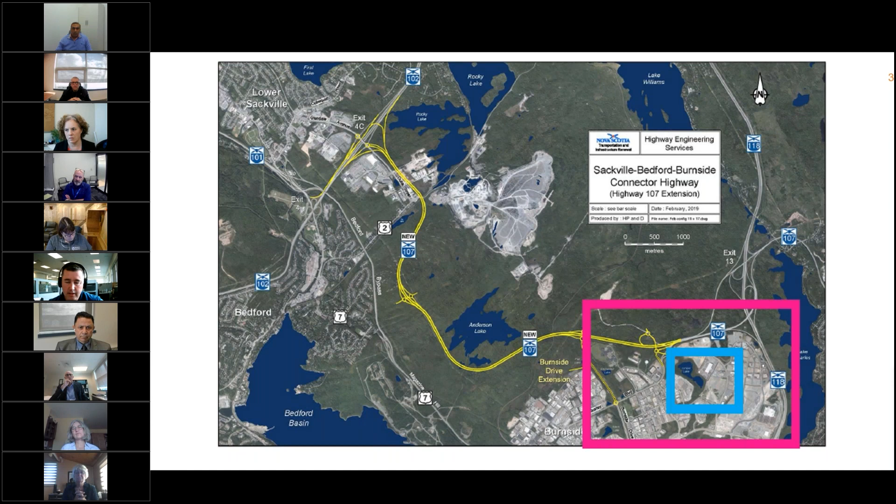The highway in yellow is the new highway being constructed by the province, a connector highway between Burnside and Bedford, to be constructed in 2024. So by the time we move into the building in 2026, that highway will already be under construction or completed. That's also the same route we're having as a right-of-way for the Bedford Burnside connector pipe, which will connect the Lake Major water distribution system with the Pockwock water distribution system along that same route. Next slide.

Now, if we zoom in a little bit closer on our map, this is our site. So we're very close to the top at Burnside, just off of Jennett Avenue. There's Wilkinson Avenue that you can see there, and that travels and connects into Wright Avenue.

The site to our right is going to be Midland Transportation, a transportation hub. Many of the other services around our site are light industrial, similar transportation hubs, sign companies, and repair shops. So we're in a very suitable location for this type of work, as well as the work around us.

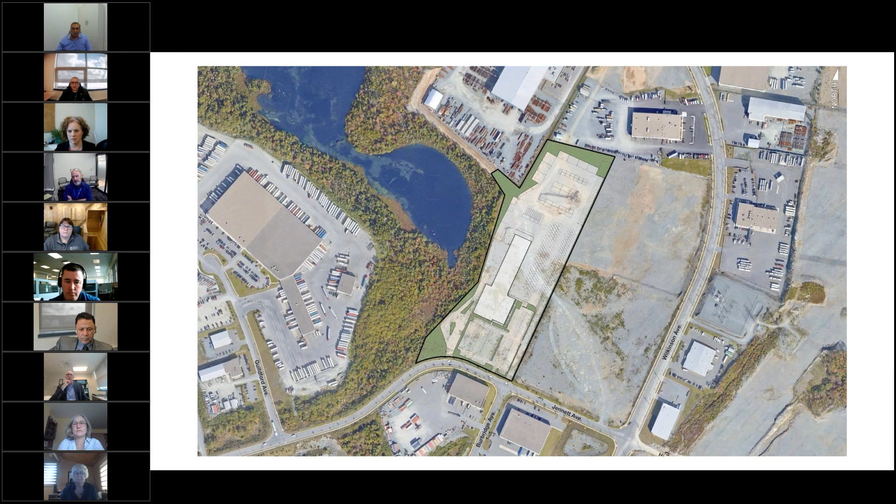As Reed and Tarek said, we've been working on this project since 2020, along with the engagement sessions. We've done a number of sessions with our staff, meeting with all the depots moving in together, as well as the combined depot, to learn from them. This is a change in culture and business practices. We've done multiple visits with all the staff to go over the changes, get feedback, and talk about what we could incorporate and what we couldn't, and why, to really get buy-in and keep them engaged and excited. Not everyone is super excited about the change, but we're working through it with our change manager to bring them along for 2026.

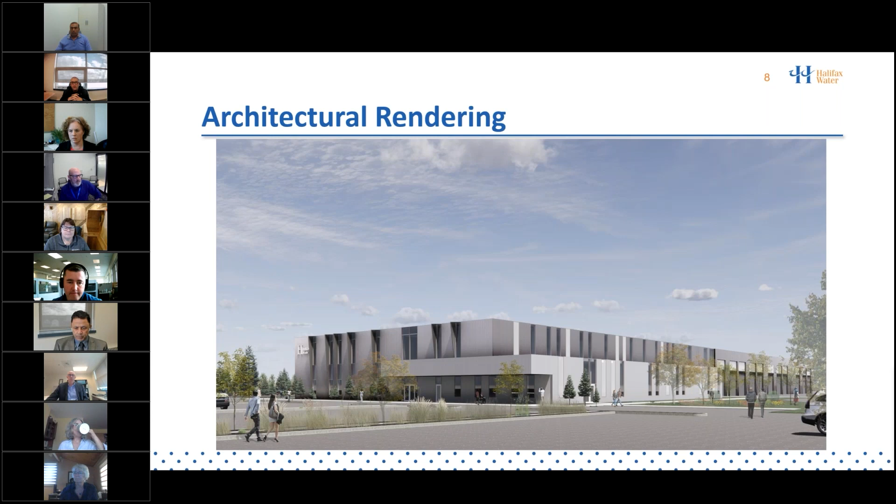So here's an architectural rendering of what the building looks like at this stage, or will look like at this stage.

This is the proposed level 2 floor plan. Currently it's a little bit smaller than the first floor. We plan to move in 150-plus people initially, with expansion capability up to 200. However, as Reed said, we have opportunities to extend the second floor perimeter out over the first floor area to match it, which would give us much more expansion capability as our service area and the population of Halifax grow.

So we're looking at growth over the bottom part of your screen, over that first floor area, expanding our vacant space. On the top part of the screen, there's a little jut out over the lunchroom below where we could accommodate expansion, and we're recommending we do this now because it'll be at the least cost.

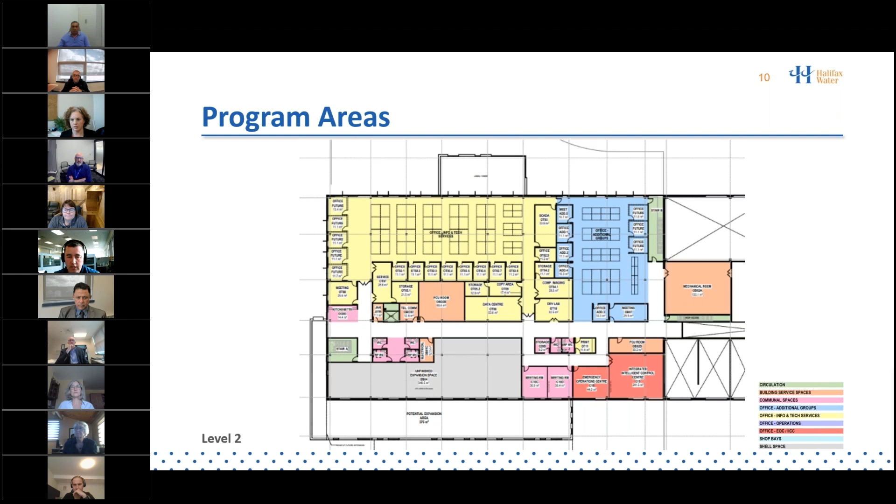This is our warehouse and bay area of the building. This is a 2-story area, so we incorporated stores. We have workshops for specialty work, and a shared tool crib where we can share tools amongst all the groups.

We've refined the size of the building in the back for parking, and we've only included those vehicles that absolutely need to be parked inside. So of the 136 plus vehicles that are going to be moving over into this facility, we've narrowed it down to just these numbers of vehicles that are going to be parked inside.

As Reed said, the additional request for extra spending is to add another bay into this bay area or shop bays now, because it's going to be the least cost and prepared for the future. We've also incorporated a maintenance bay so we'll have maintenance technicians capable of servicing two-thirds of the vehicles in our fleet at this facility.

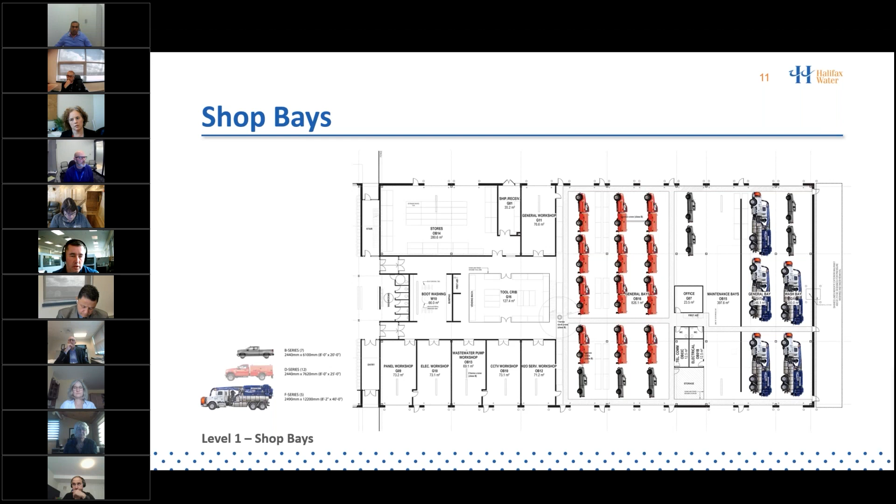This is going to be a video fly-through of the site as proposed and the design, and that's been a collaborated process of having our managers and supervisors review the site, review the building, find out what they like, what they don't, what they need to successfully move into this building and operate it for the next 50 plus years. So Jake, if you want to press play.

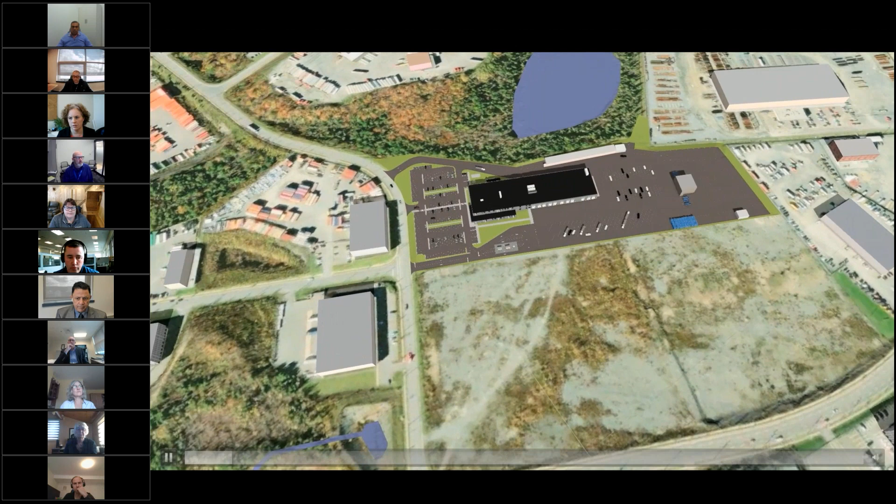I don't hear any music, Jake, but there is music going with this. More elevator music, if you can imagine that as you drive through here. I need the music, it's a matter of taste.

So the green and red arrows is our...

Sing, Rob. What's that? I have to sing. You haven't heard my voice.

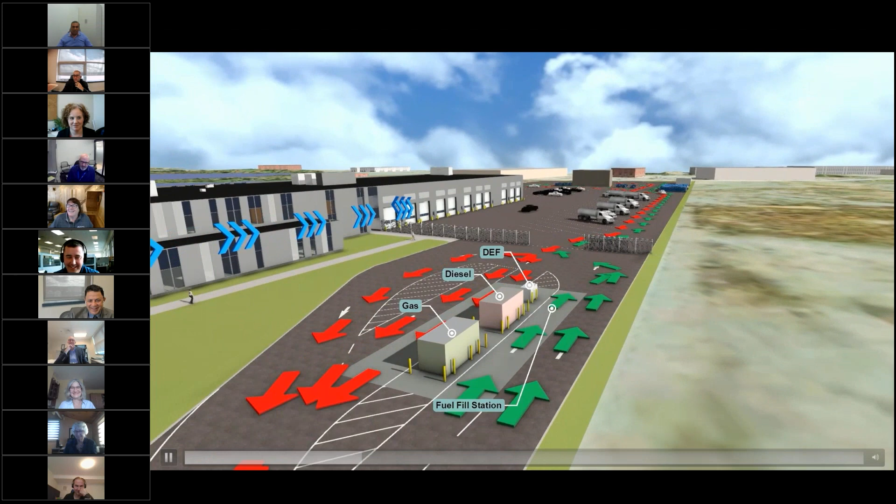We just passed a shared fuel station with HRM.

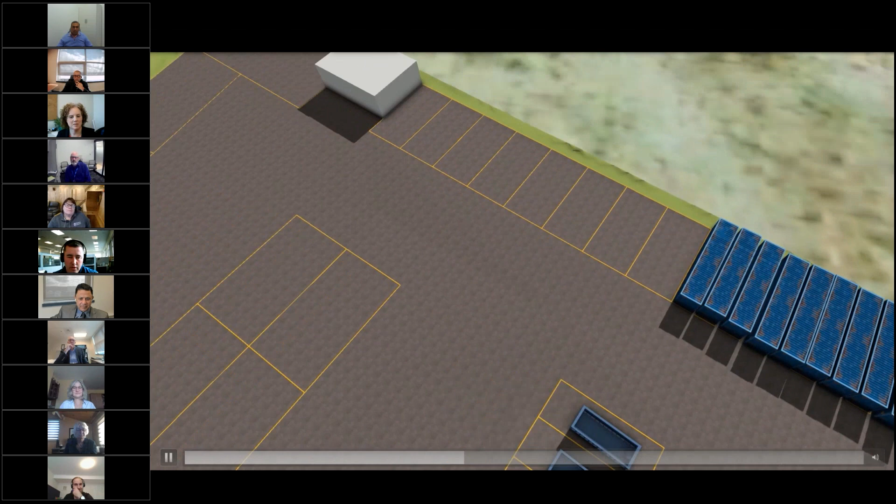Come through our main gate, parking here on the left-hand side for all our vehicles. We have some storage sea cans, some lay-down areas, some waste bins. Coming through a snow clearing area where we lay some bulk materials, a cold patch storage building, and some other lay-down areas for equipment and storage.

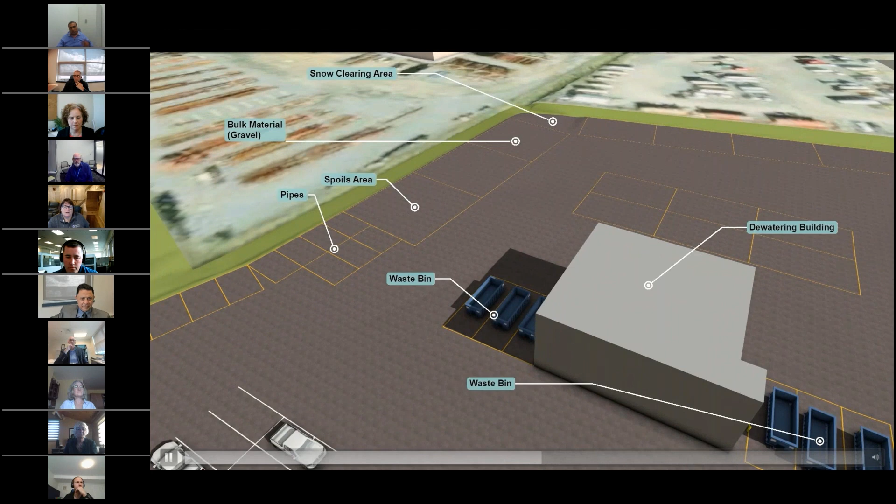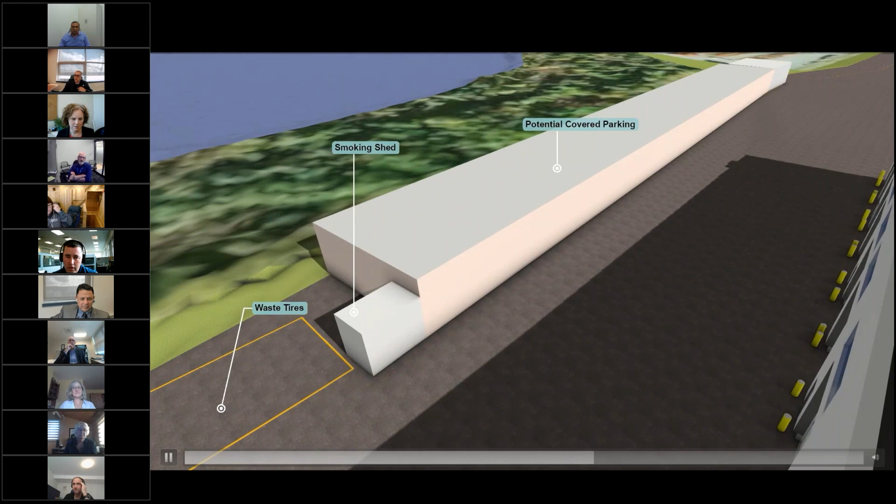The gray buildings are a dewatering building that Reed was talking about, some waste bins and more storage areas. We'll have a communications tower here, cold storage building that's not for cold equipment. We have the potential for covered parking, so this covered parking would be one of the areas that we would like to do now versus later.

Some waste tires, our second gates. We have 2 in and out routes completely for our Halifax Water vehicles. That's exterior of our lunchroom.

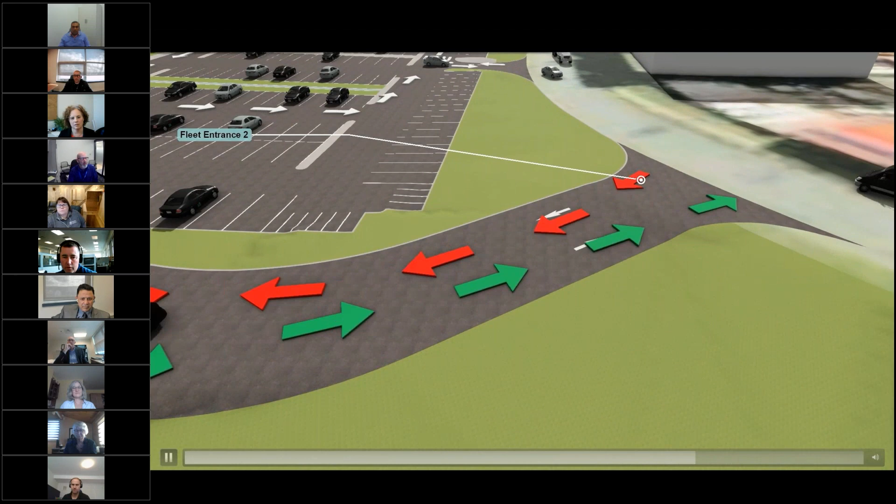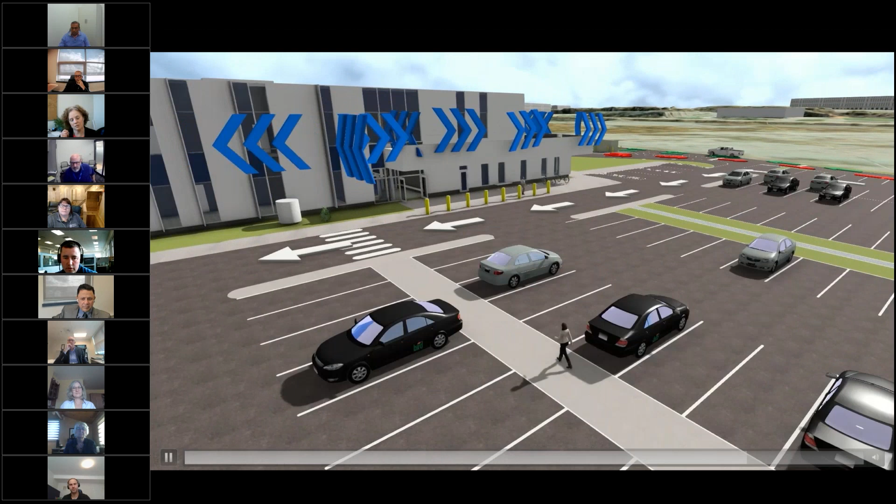And then we have over 200 parking spaces for our Halifax Water staff for present and the future, with the 3 access driveways we have 3 in and out routes for our personal vehicles. Main entry, bicycle parking. Another main entrance on the side.

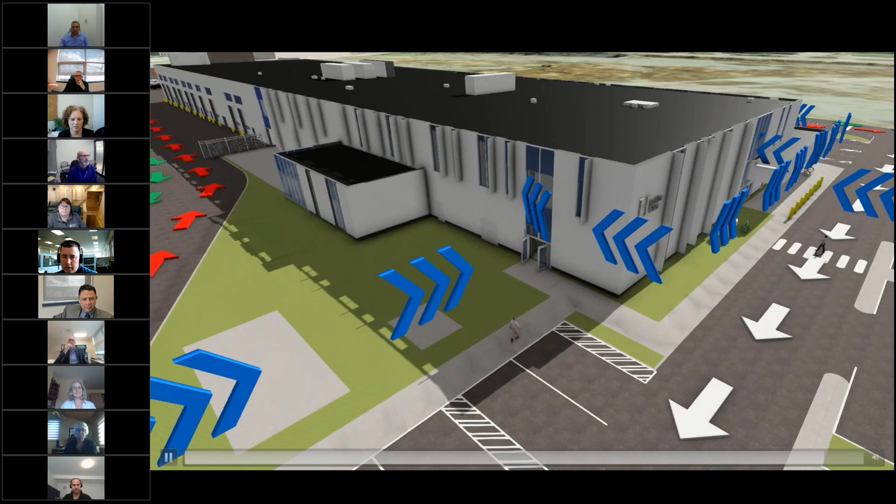And the roof, we are filling the roof with solar PV panels. Currently the target cost is a 475 kilowatt system of solar PV. It's going to align us well with HalifACT 2050, and if we do the expansions over the roof on the 2nd floor, that'll also add additional PV that will get close to potentially being net zero, which will be evaluated once we move forward into the design.

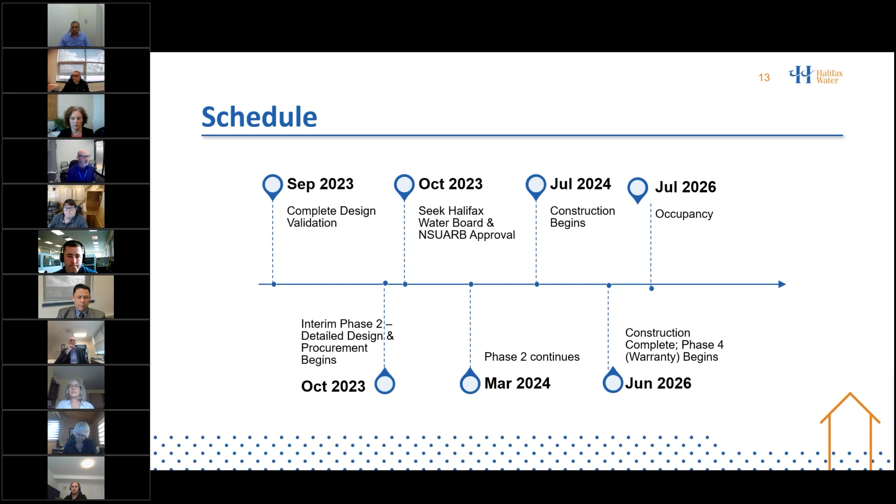And then we've come to the end of the presentation, so if there's any questions for me, please go ahead.

Hey Rob, does Sanjeev have any presentation? Oh, we're good, I'm good. No? Okay, and Commissioner Cuddle has a question just before we head there. We did start a bit late, cognizant of time, who has a hard stop at 3?

Costi does? Yeah, I do too. You do too? Okay.